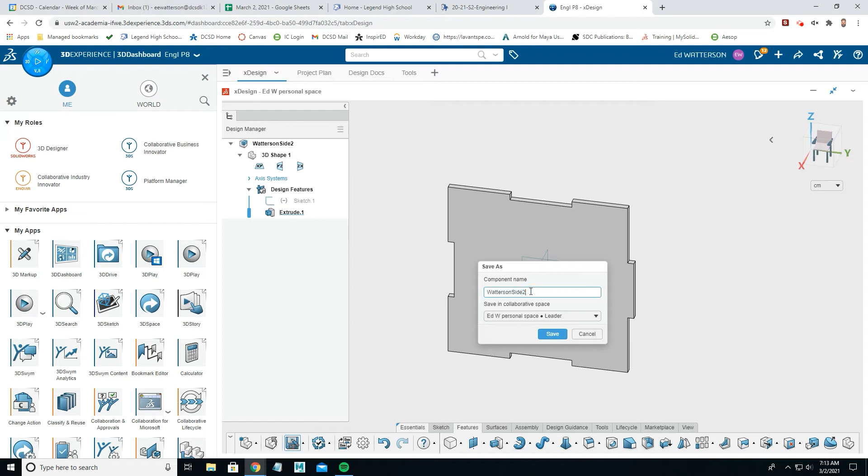You're going to want to resave this several times. Click Save As, and keep changing the name until you get all of the sides saved. You can import it from one side, the same one each time, but it seems to work better if you resave it as multiple sides.

Since you need 4 of those, I can go ahead and save them all, then import them all later. So saving 4 separate copies of the same thing seems to work a little bit better.

When you're ready to make your assembly, go to New, create a new component, make sure it's in your personal space. I'm going to call this one Final Fit Assembly, just so I know what it is.

Then I'm going to switch to the Assembly tab, and bring in existing components, which looks like this little stair step with the arrow, not the one with the little star, just the stair steps and the arrow. So I'm going to click that, and it's going to go out.

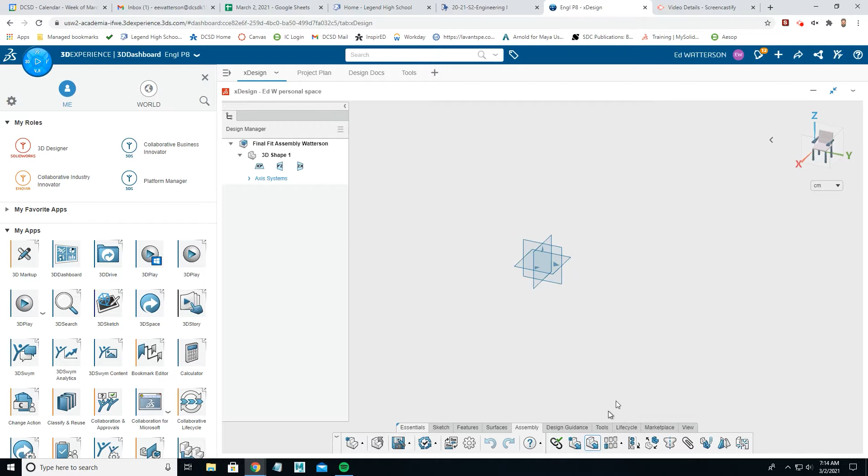It's going to ask me what I want to go through. There's a bunch of things out here, so I want to double check and make sure I get the ones that I need. I'm going to click on the first one, hold the control key, click on the second, third, and fourth one. You're going to see a lot of different things, so make sure you grab the right ones for you. I put my name in things, so it's easier for me to find them. I'm going to click OK.

It should bring in all of those pieces for me. Now all of my pieces are inserted, and I've got them all where they need to be. You'll notice I created my top and bottom on the XY plane and the rest on the YZ plane, so they're all kind of vertical or horizontal, where they need to be.

If you did not do that, this still works. You don't have to remake anything, but it's worth your time to try and do them on the other planes. It saves you a little bit of time in this step.

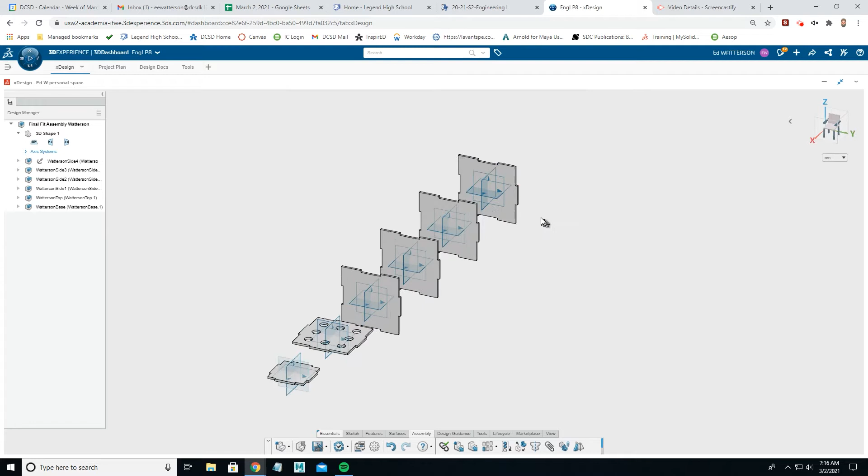The first thing I want to do is put these back 2 sides together. This is a lot like gluing. If you remember doing the mates when we did them inside of SolidWorks, if you've worked in SolidWorks before, this is the same process. You just kind of figure out where you want to put glue.

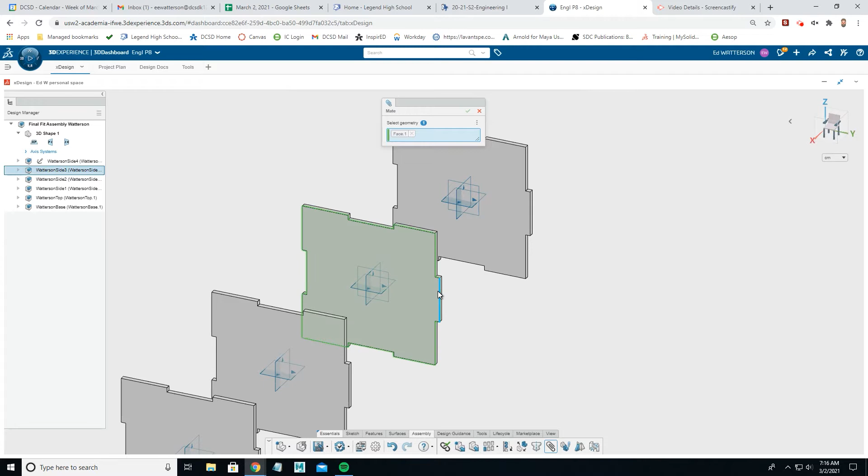So I want this tab right here to be glued to the inside of this, that's where I'm going to start. I'm going to click with the paperclip to insert my constraint. First I'll click where I want the glue to go on this piece, then rotate around and click where I want the glue to go on that piece.

So I want it to touch right here, that front part of that tab on the inside of this. So I'm going to click it. It's going to ask me how I want to connect it. I want to do coincident so they touch.

When I click apply and continue, it may flip the wrong way. I want this surface and this surface to touch, but unfortunately it's going the other direction. I want it to point towards the back, the other one. So I'm going to flip this orientation piece.

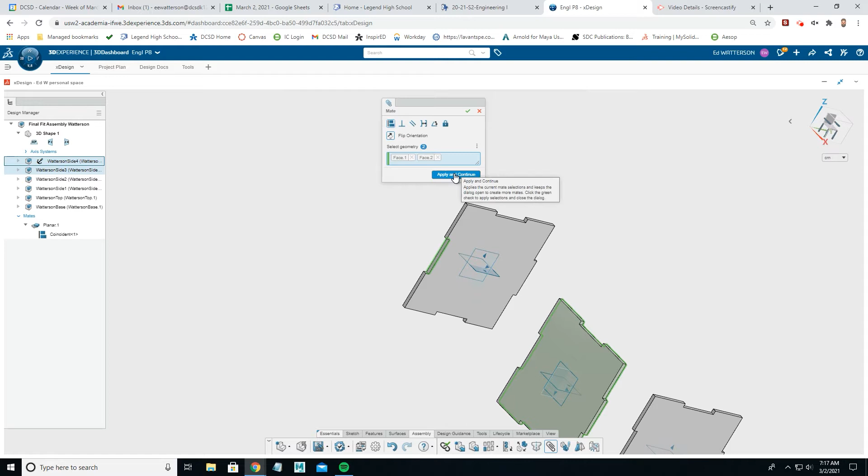Go ahead and click apply and continue. Then those 2 things are now set.

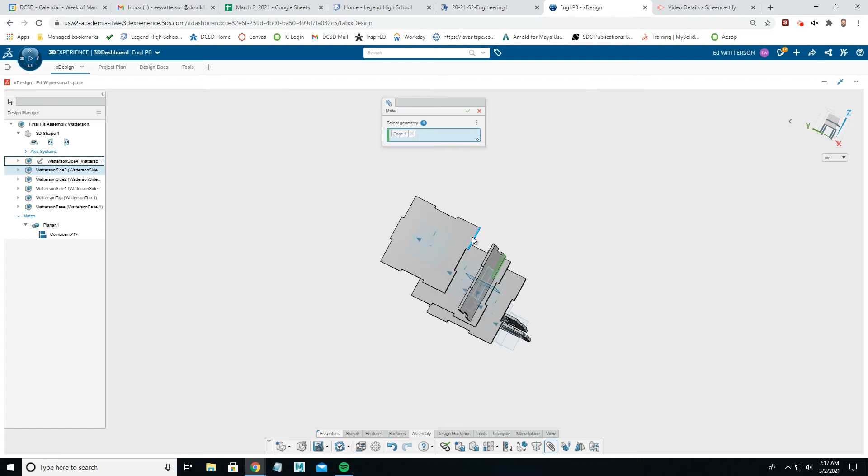So the next 2 pieces where I'm going to put glue are here, this surface, and I'm going to rotate around, and it's going to connect to the back surface here. I'm going to click that, and then those 2 pieces should slide together. That looks good. I'm going to click apply and continue.

So for my next piece, this is kind of facing the wrong way, so I need to do a little bit of adjustment before I can use it.

So I'm going to right click on it, and then I have this little double arrow thing. One's in a strange 3D pattern, and the other one's in a cross pattern. It's called Move with Triad. Go ahead and click that, and then I have lots of different options.

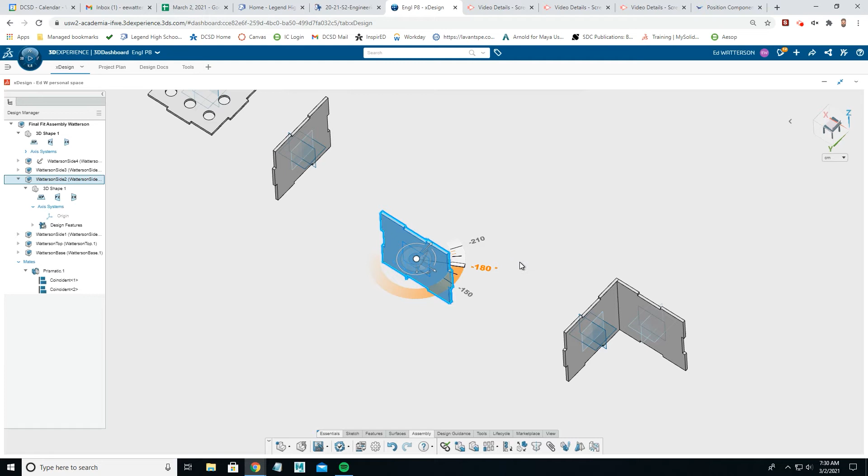The first thing I'm going to do is flip this around 180 degrees, making sure I go exactly 180 so it's exactly in the position it needs to be in. Now it's flipped and it's where it needs to be. This is how, if you have parts that are not quite exactly right, you can push them into the orientation you need to get them to.

I'm going to go ahead and click that, click off. It's going to leave that part in the right place. Now I can come back in and continue the way I was before.

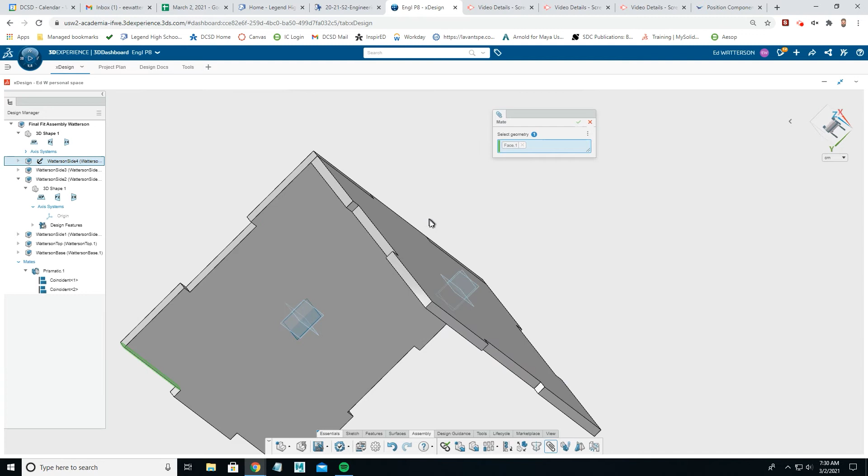So I'm going to turn on the mate tool. I'm going to select a side, rotate it around, and then that part would glue right here when I glue them together. Do a coincident mate, click apply and continue.

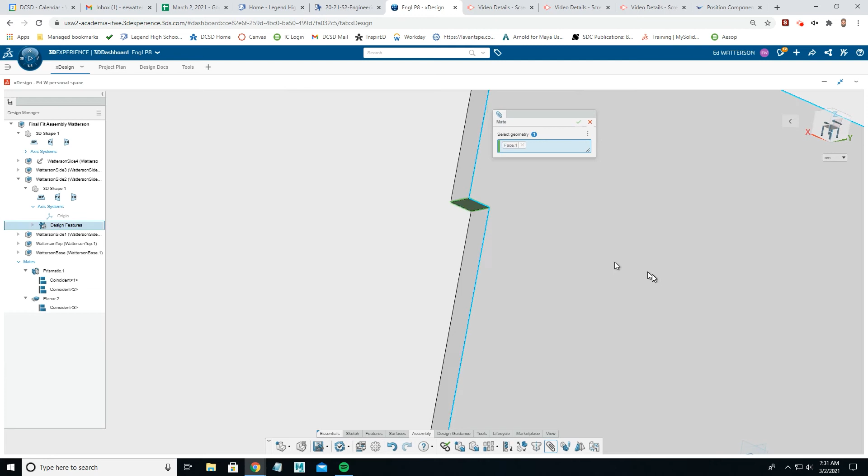I want to make sure that these, since I've done some rotation, are exactly in the right level position. So I want to select the inside surface here and the top surface here. Those would glue together, so I'm going to zoom in a little so I can see it. Make sure I have a coincident mate on there, and click apply and continue.

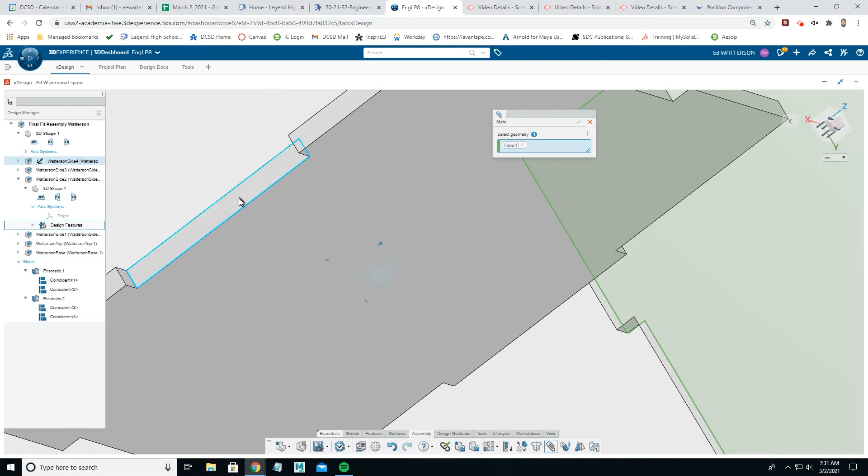And then the last one I have is this inside surface is going to be coincident with the inside of this slot. Give it a second to think. It's going to slot that into place, and then I'm going to hit the check mark, and it's going to put it in. Now you're going to continue on until you get everything into place exactly the way you need it, and then we're going to check it out and see what things are not correct.

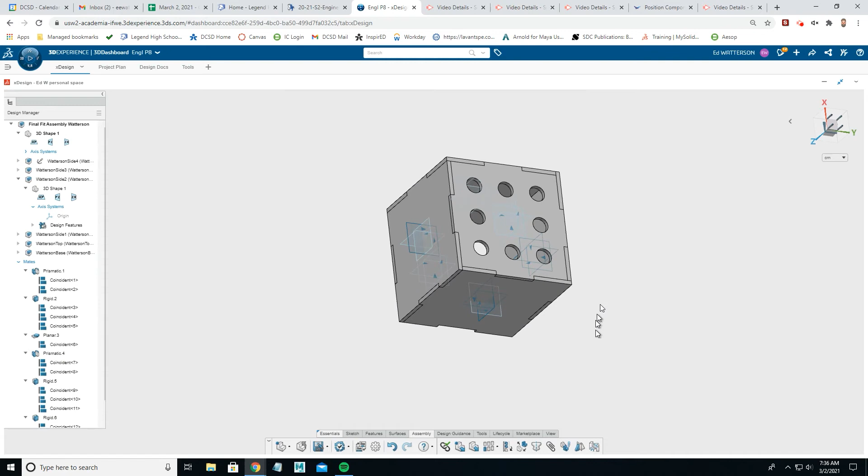So I just finished putting in all my mates and constraints, so everything's good. Looking at my box, everything seems to fit just fine. There's no overlap on any of these gaps. I don't have any overlap or spaces on the corner.

And then, oops, wait, when I turn around and look at the bottom, looks like I haven't made my piece for the bottom the right size. It's way too small. So rather than messing with it in the assembly, I need to go back to the original part. So I'm going to go ahead and click Save.

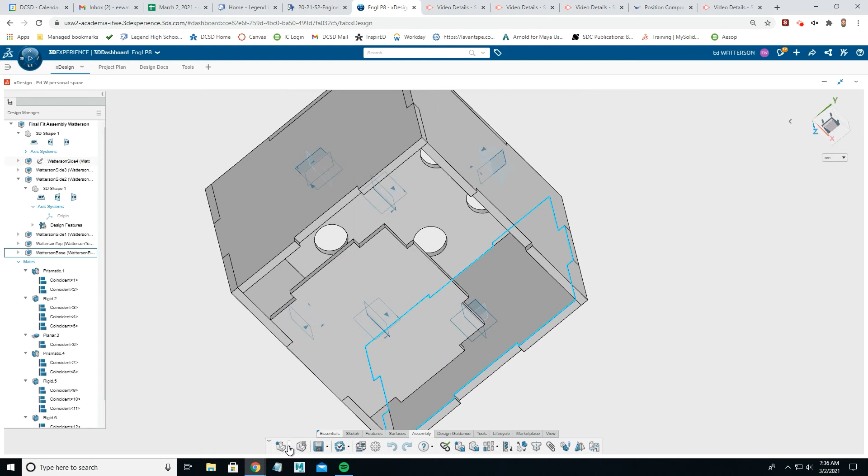So everything that I have here work-wise is saved, and I can come back to it. I'm going to come over here, click Open, and look for the Watterson base, because that's the name of mine, so I'm going to put the base of mine. Then I'm going to open up that base, click that, open with xDesign. And then I need to go back in and figure out what's wrong with my drawing and figure out why.

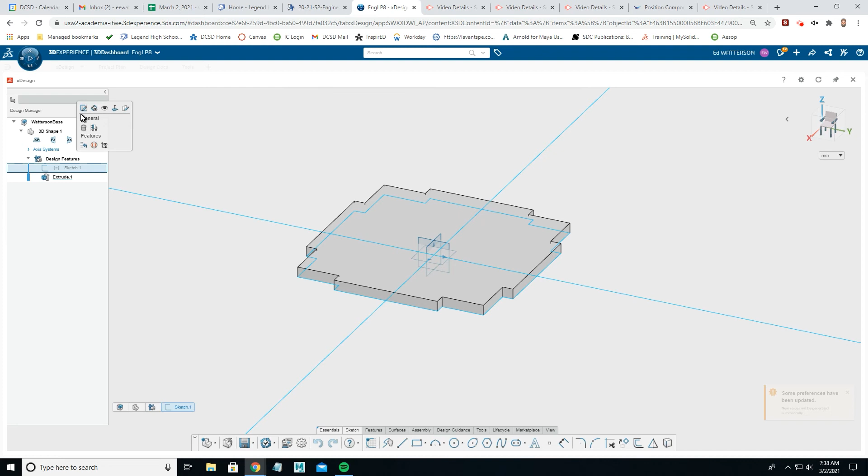So I'm going to go back into my original sketch. I'm going to edit my original sketch. Switch so I'm normal to. And see where I'm at. Oh, it looks like this is going to be my problem.

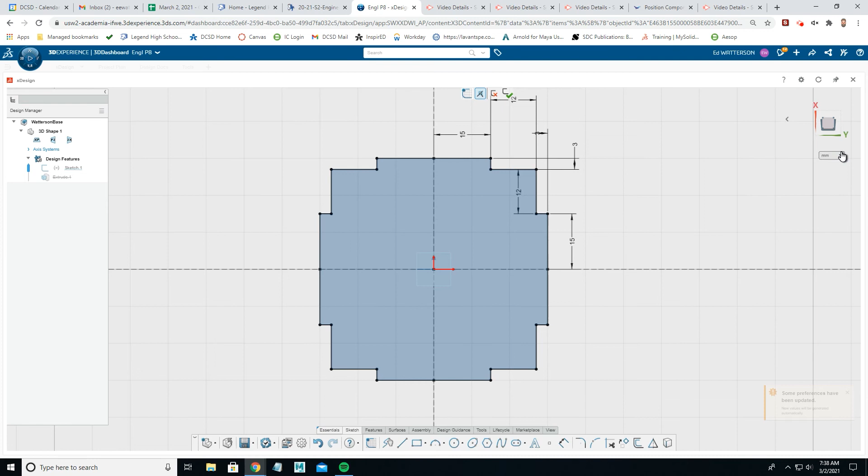This and this are the wrong size. So actually what I need is my dimension from this end to my midpoint line should be half of my total height, which is 4.5, and instead it's 3.

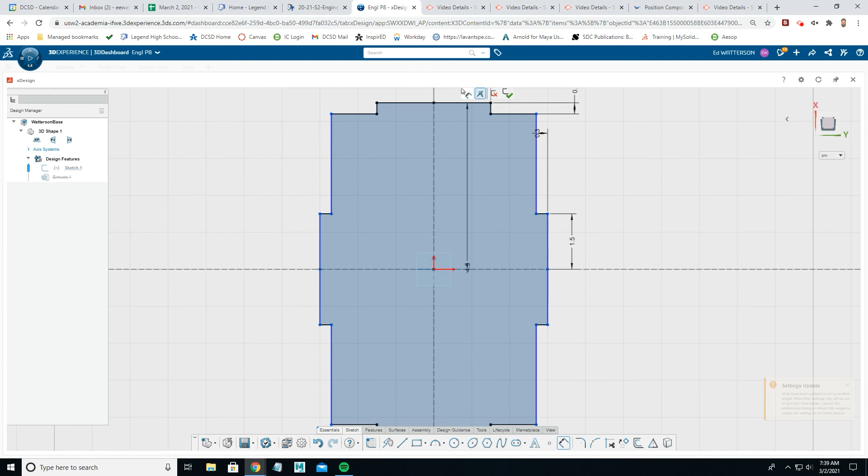So I'm going to put in a dimension there to make that 3, and then come back over here, do the same thing on this side, make this one 4.5. So I'm going to switch that 3 to 4.5 on both of them. Hit the check mark, it's going to rebuild my part. I'm going to save my part.

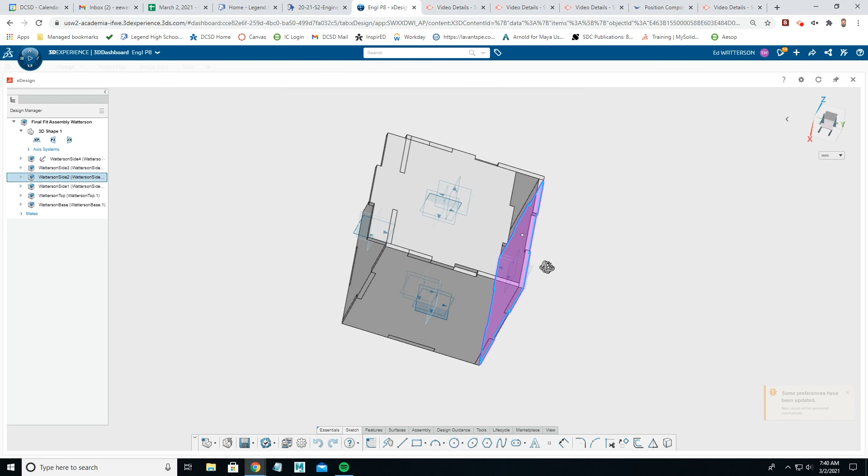And then hopefully when I come back over to my assembly, all my parts are updated in the right size. Now it's a little bit off in size, which is fine. I just need to take and fix some of the mates in there and get it put back in.

So I'm going to put this one here, and then one there, to slide it into place, click Apply and Continue, and then my entire box is finished and ready to be checked.